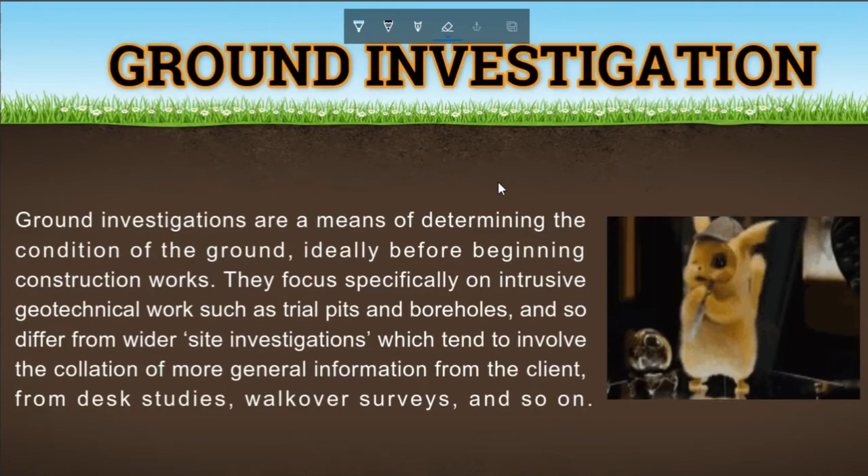So as the name implies, it is the method of investigating the ground, whether it is possible to build, for example, a two-story building, if it is compatible. Thus, the ground can bear the weight of the building. Next is borehole. So, since the topic is ground investigation borehole, what is a borehole?

It is a narrow hole drilled to establish the nature of, sample, test, or monitor soil, bedrock, or contained fluids and gases, or for abstraction of water or minerals. Boreholes are among the most frequently used methods of exploration in engineering geology and rock-related construction.

The greatest yield of geotechnical data is obtained from these boreholes when the borehole walls are investigated in addition to the core. So, what does borehole really mean? It is a hole in the ground. It is as big as 1 meter or more, and it is used to investigate the ground, whether it is solid ground, sand, or gravel, or whatever is underneath our feet.

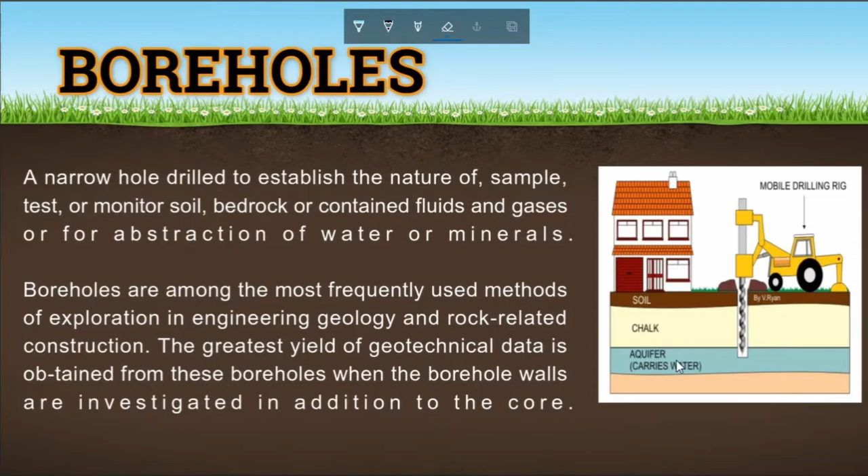Next is borehole drilling method, and there are 3 groups of methods. First is soil penetration, and we know that soil is smooth and sometimes it's sticky. Second is rock penetration. This one is the harder one. And lastly is the required sample or core recovery penetration. So later on, we will discuss and understand these 3 groups of methods.

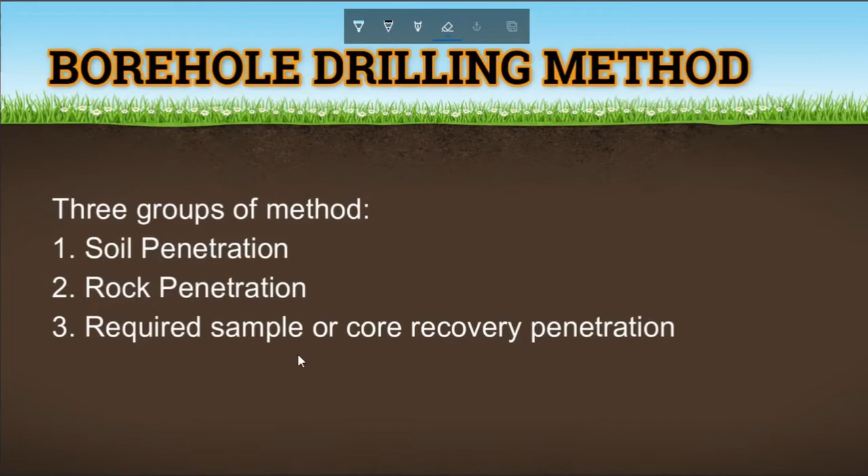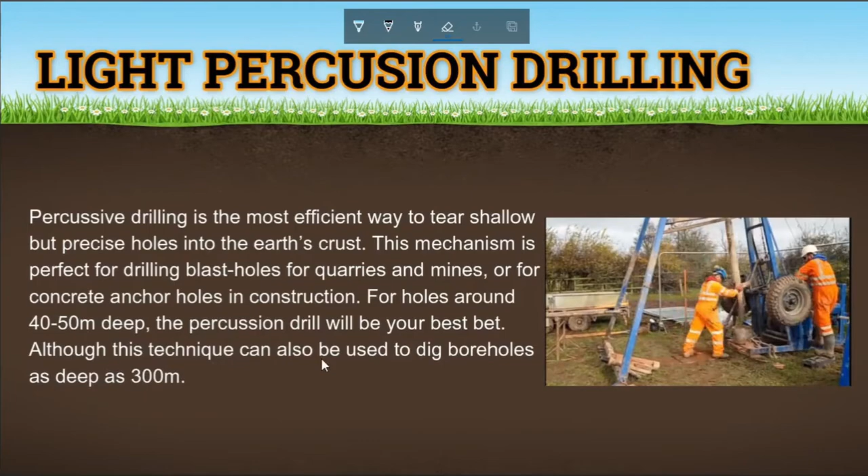Light percussion drilling. Percussive drilling is the most efficient way to tear shallow but precise holes into the earth's crust. This mechanism is perfect for drilling blast holes for quarries and mines, or for concrete anchor holes in construction. For holes around 40 to 50 meters deep, the percussion drill will be your best bet, although this technique can also be used to dig boreholes as deep as 300 meters.

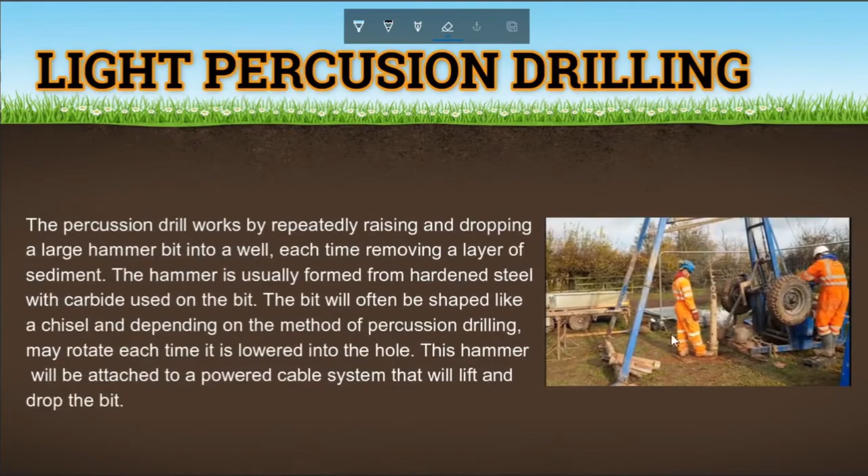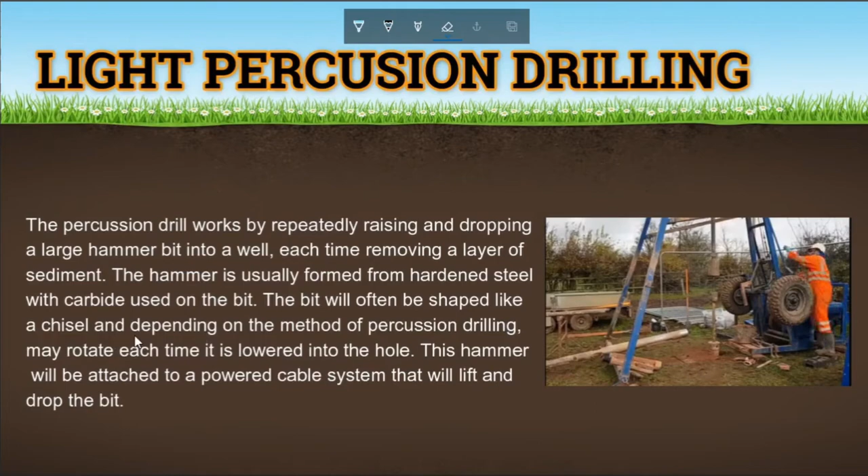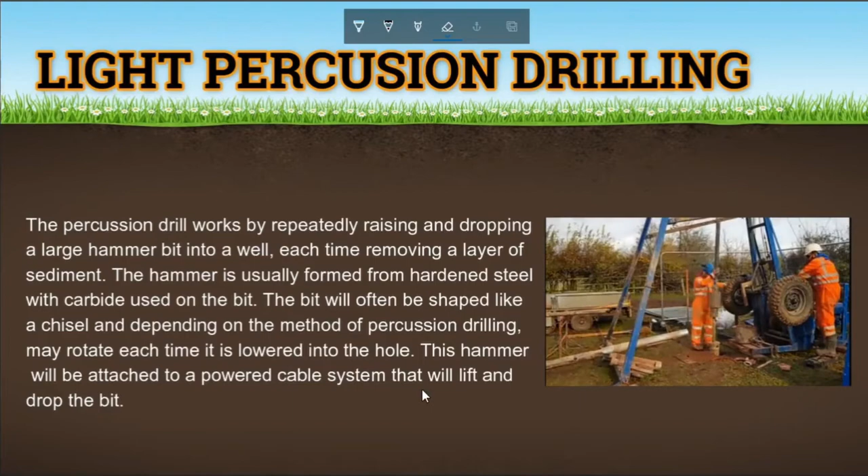The percussion drill works by repeatedly raising and dropping a large hammer bit into a well, each time removing a layer of sediment. The hammer is usually formed from hardened steel with carbide used on the bit. The bit will often be shaped like a chisel and, depending on the method of percussion drilling, may rotate each time it is lowered into the hole. This hammer will attach to a powered cable system that will lift and drop the bit.

This technique has existed through the ages. It used to require a hefty amount of manual labor, and yes, it still exists, for example, making a well. And in some third world countries, it still does. The manual predecessor to cable or rope percussion drilling works on the backs of the laborers.

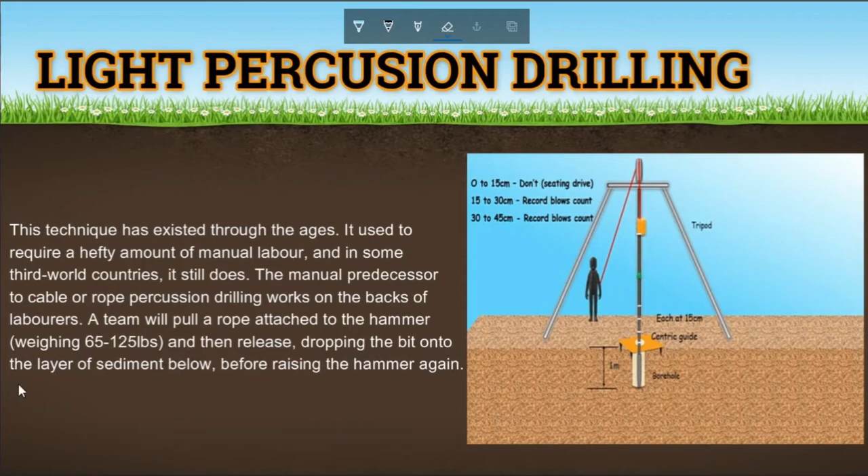A team will pull a rope attached to the hammer, weighing 65 to 125 pounds, and then release, dropping the bit onto the layer of sediment below, before raising the hammer again. This technique is still used to reach water in some African nations.

Manual percussion drilling uses water to create mud in the pit of the well. Next, a hollow tube that traps the mud is lowered into the well. This tube is then lifted to the surface and cleared. In air percussion drilling, the hammer will be driven by compressed air, with the rubble being cleared by the air returning to the surface.

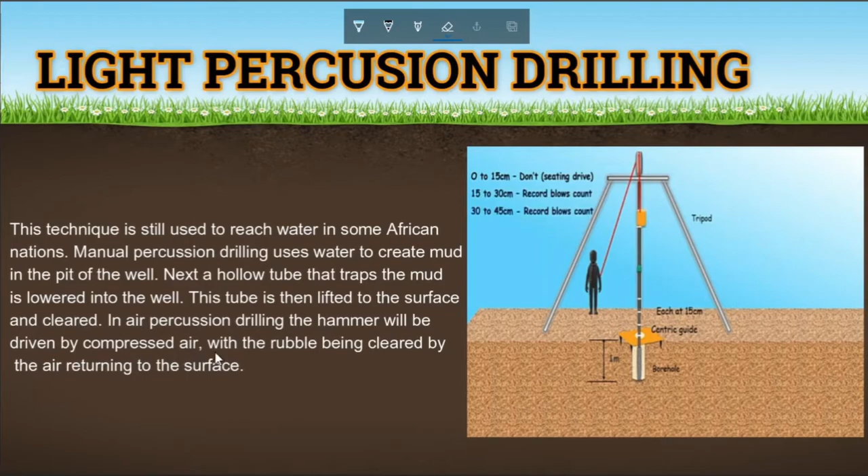And this is the illustration of the light percussion drilling, or the manual labor. As you can see in the picture, there are persons who are pulling the rope.

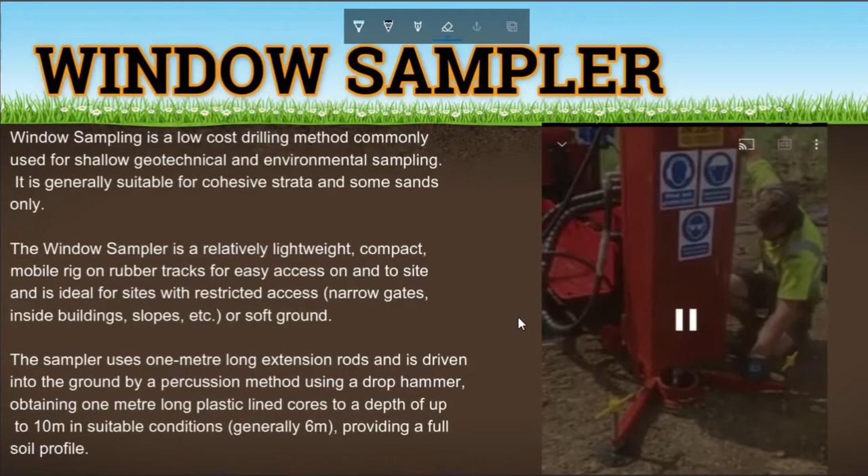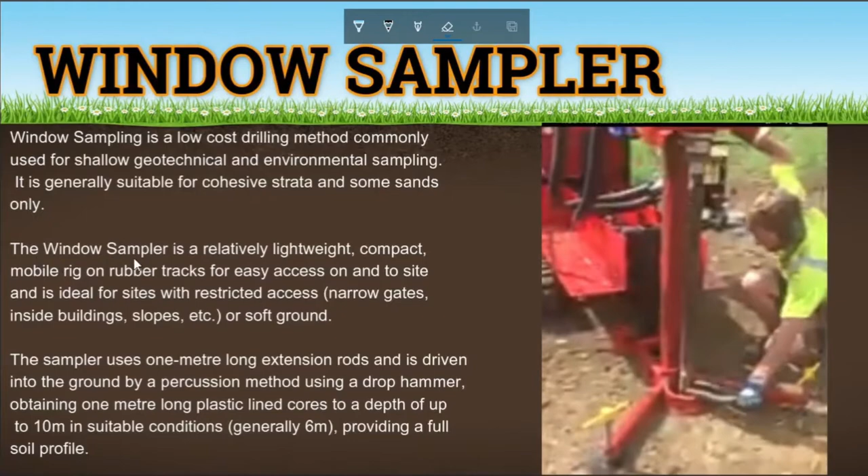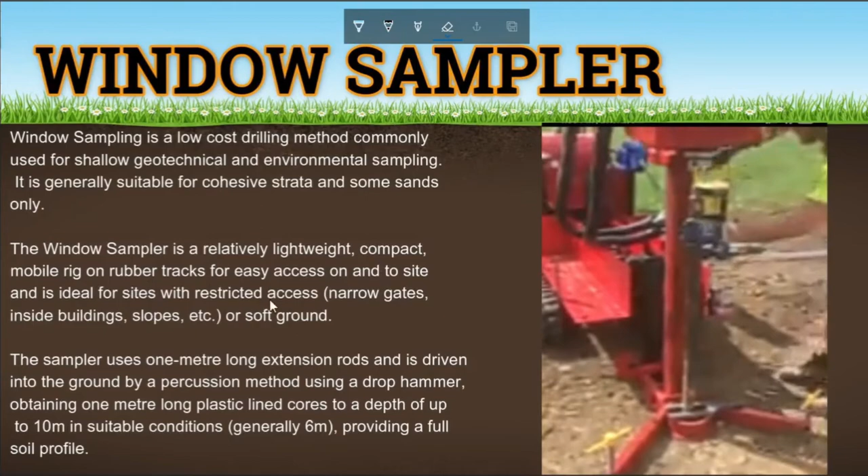Window sampler. Window sampling is a low-cost drilling method commonly used for shallow geotechnical and environmental sampling. It is generally suitable for cohesive strata and some sands only. The window sampler is a relatively lightweight, compact, mobile rig on rubber tracks for easy access on and to site, and is ideal for sites with restricted access or soft ground.

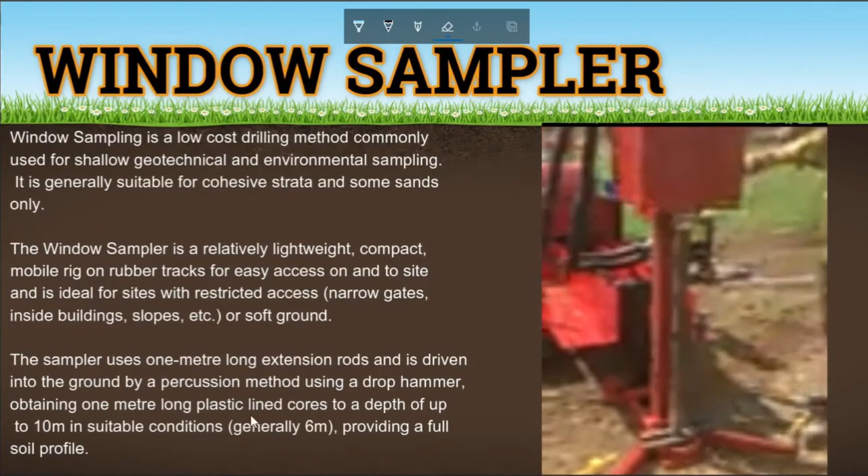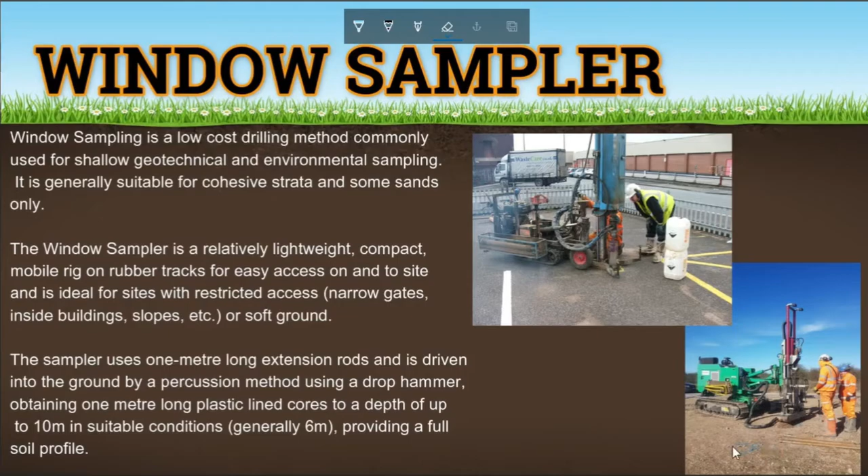The sampler uses 1 meter long extension rods and is driven into the ground by a percussion method using a drop hammer, obtaining 1 meter long plastic lined cores to a depth of up to 10 meters in suitable conditions, generally 6 meters, providing a full soil profile. And these are the examples of window sampler. As you can see, the ground is only a gravel or sand that is compacted.

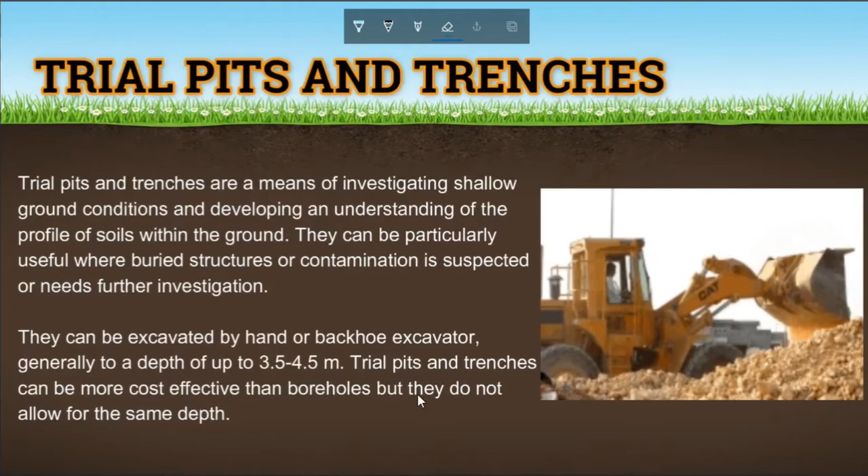They can be excavated by hand or backhoe excavator, generally to a depth of up to 3.5 to 4.5 meters. Trial pits and trenches can be more cost-effective than boreholes, but they do not allow for the same depth. These are the examples of trial pits.

Rotary coring. Coring is one method of collecting rock and sediment samples for geological research. A coring drill bit is designed with a central opening, around which the drill bit cuts the borehole. The core samples enter this hole into a special chamber, a coring barrel, as the coring bit advances, and then the sample is returned to the ship by wire.

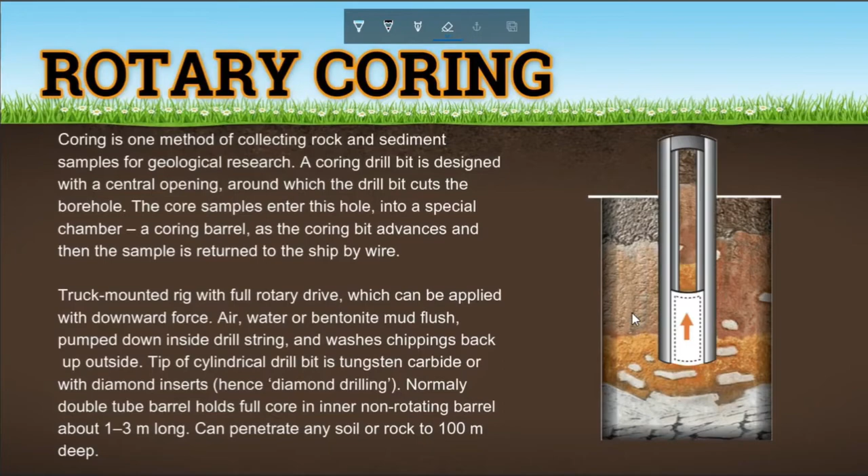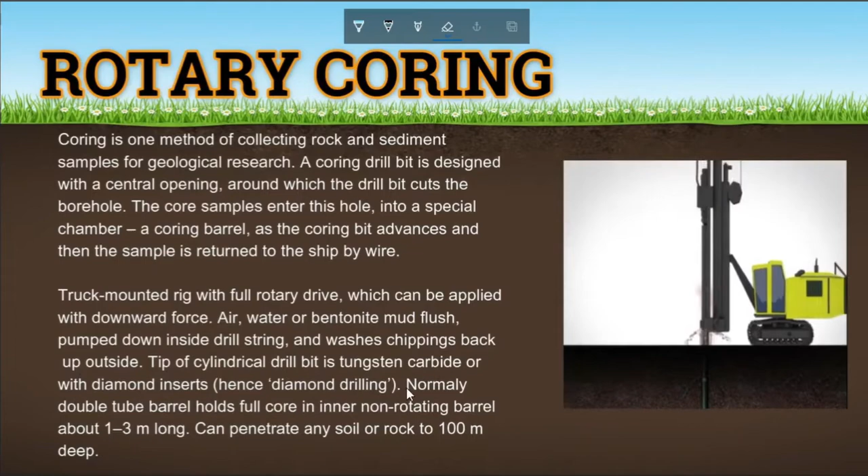Truck-mounted rig with full rotary drive which can be applied with downward force, air, water or bentonite mud flush, pumped down inside drill string, and washes chippings back up outside. Tip of cylindrical drill bit is tungsten carbide or with diamond inserts, hence diamond drilling. Normally, double tube barrel holds full core in inner non-rotating barrel about 1 to 3 meters long. Can penetrate any soil or rock to 100 meters deep.

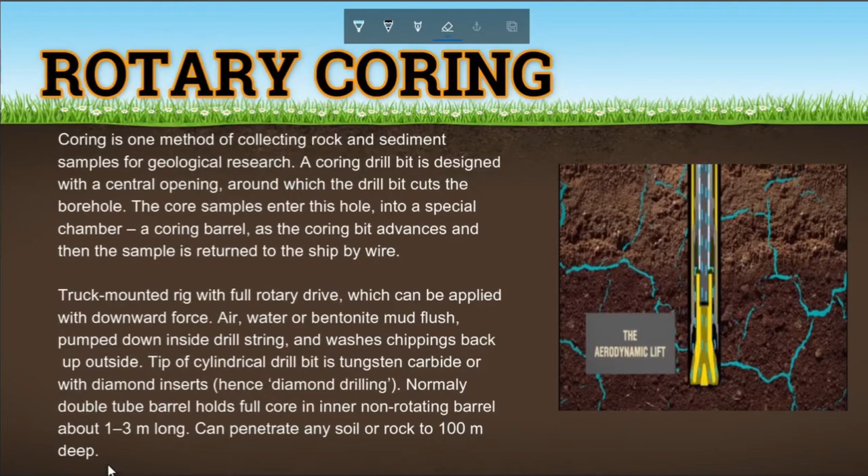Additionally, don't be confused about the meaning of rotary coring. By definition, coring involves drilling with a donut-shaped bit that allows a cylinder-shaped core of undrilled rock to rise up inside the pipe above it. Or coring is taking a cylindrical sample of a reservoir using a special drill bit and barrel.

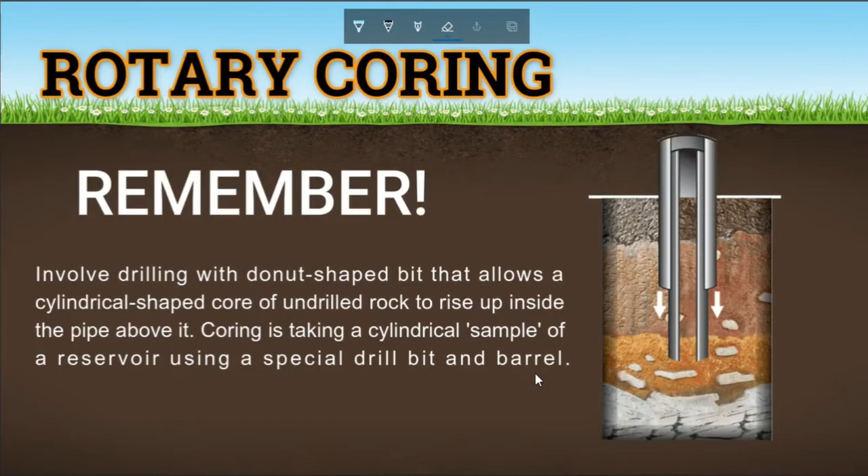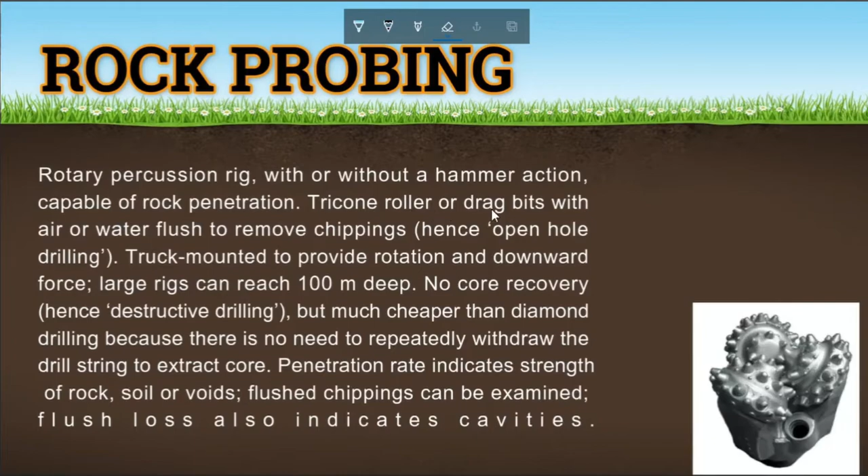Rock probing. Rotary percussion rig with or without a hammer action, capable of rock penetration. Tricone roller or drag bits with air or water flush to remove chippings, hence open hole drilling. Truck mounted to provide rotation and downward force. Large rigs can reach 100 meters deep. No core recovery, hence destructive drilling, but much cheaper than diamond drilling because there is no need to repeatedly withdraw the drill string to extract core.

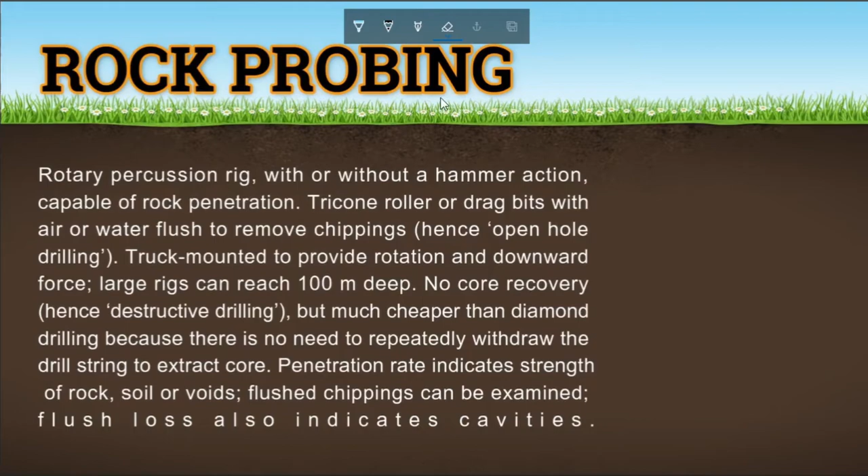Penetration rate indicates strength of rock, soil or voids. Flush chippings can be examined. Flush loss also indicates cavities. And also, about rock probing, don't be confused, because as defined, probing is for examining or observing a sample. And these are the alternatives among drilling equipment.

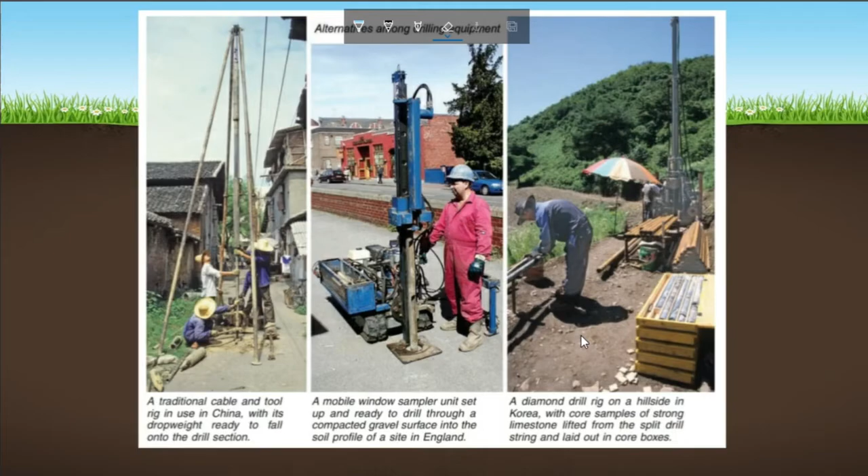The third one is an example of rotary coring, since as you can see the person is getting some samples, and of course it is under rock probing also, because after getting samples, the samples should be examined, and that is under rock penetration, and at the same time under core recovery penetration.

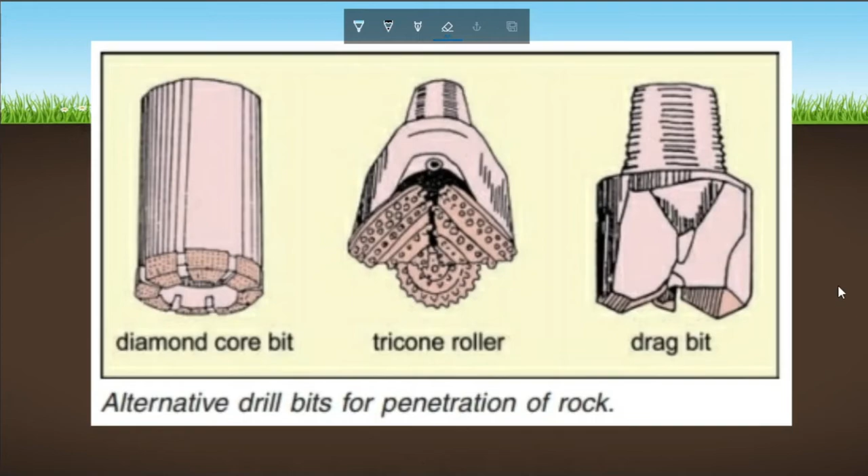And these are the alternative drill bits for penetration of rock. First is the diamond core bit, second the tricone roller, third the drag bit. Later on, I will be showing you a short video clip of how these alternative drill bits work.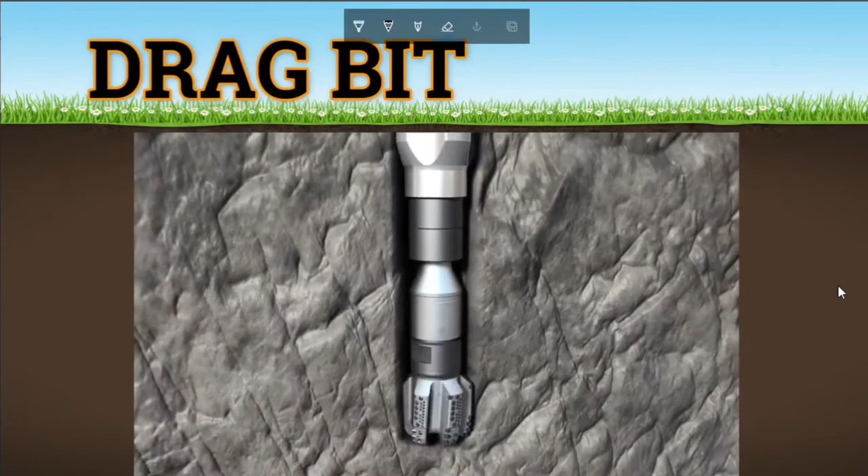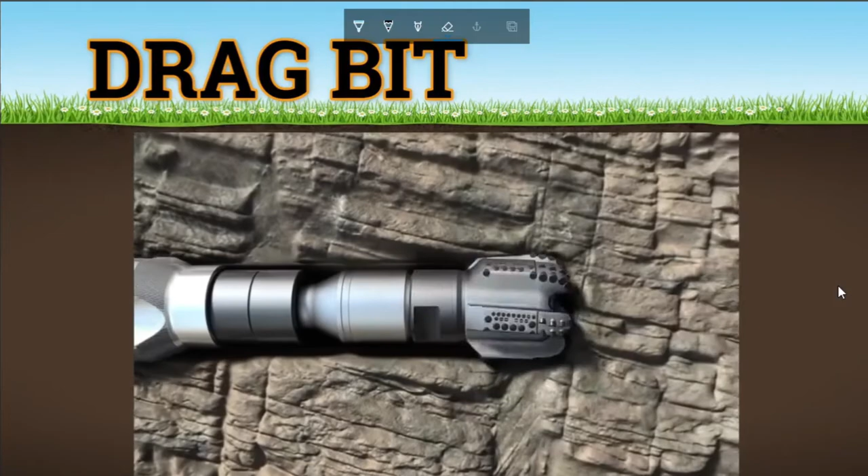Borehole records. All boreholes must be logged as fully and comprehensively as possible to be properly cost-effective. And as you can see in this picture, under the Nottingham Drilling, it has this client, the John Smith Construction. And they use two equipments. First is the cable percussion, which has a 6 meters depth, and the rotary coring, which has 24 meters depth. Summary log, and it happened in Derwent Road, Nottingham. Date is on 29th of February 2008.

Number, NGR, level, and the site coordinates. So, as you see here, it has these letters with its units. Under these columns, we can see the meaning of those letters above. D is for disturbed sample, U is for undisturbed sample, S sampling, K permeability, I point load strength, and standard penetration, R for rock quality designation, and C for core recovery.

The first equipment they use is cable percussion, and it only has 6 meters depth. So that is why there is this boundary or limitation line. In the first meter, it has disturbance, which is this symbol letter D. It has no K, I, R, and C, but has this, which means blows. And it has 6 counted blows. 1.4 meter depth, and this is the graphic log. For the thickness, it has 1.4 meters, and this is the description.

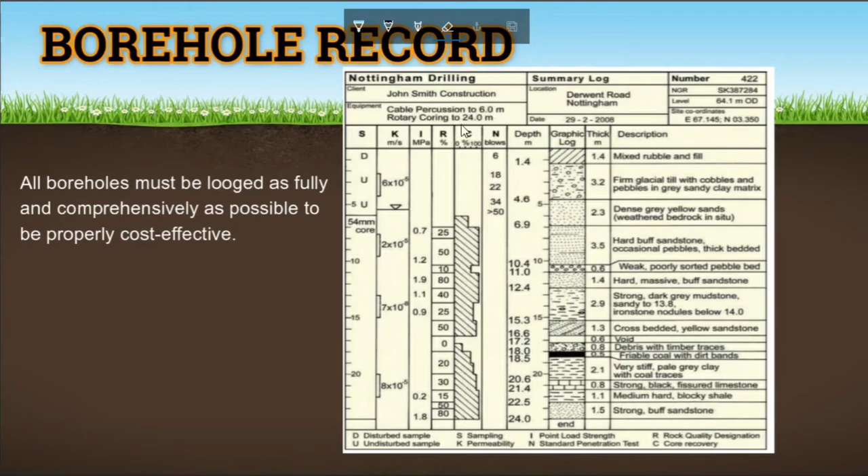How many boreholes and how deep? This can only be very rough guidelines. For spacing, buildings should be 10 to 30 meters apart. Road lines is 30 to 300 meters apart. And lastly is the landslides, at least 5 in line for profile. And for the depth, 1.5 times the foundation width below founding depth, plus at least one deeper control hole to 10 meters below foundation unless rockhead found.

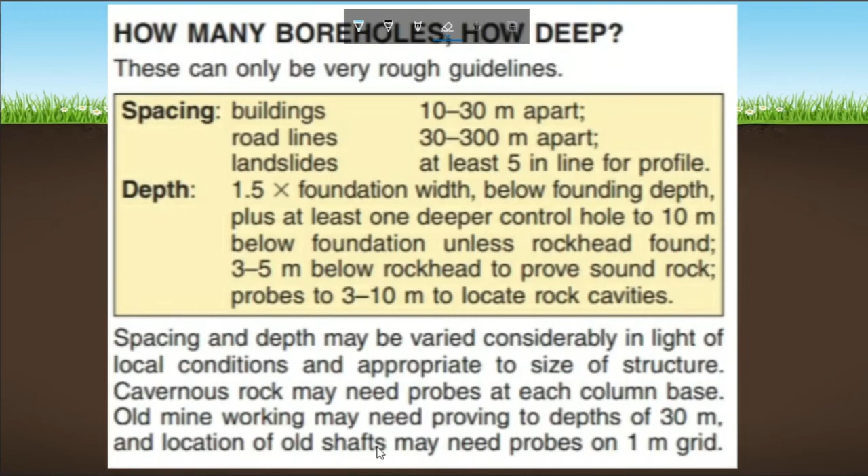3 to 5 meters below rockhead to prove sound rock. Probes to 3 to 10 meters to locate rock cavities. Spacing and depth may be varied considerably in light of local conditions and appropriate to the size of structure. Cavernous rock may need probes at each column base. Old mine workings may need probing to depths of 30 meters, and location of old shafts may need probes on 1 meter grid.

And this is for the borehole costs. Drilling costs may be estimated as accumulation of first, cost to supply rig onto site, second, cost of setup on each new hole, third, cost per meter of hole drilled. This table shows approximately relative costs: on-site plus per hole plus meter. First is window sampler, soil less than 8 meters deep, 400, 25, 7. Light percussion, soil greater than 8 meters deep,

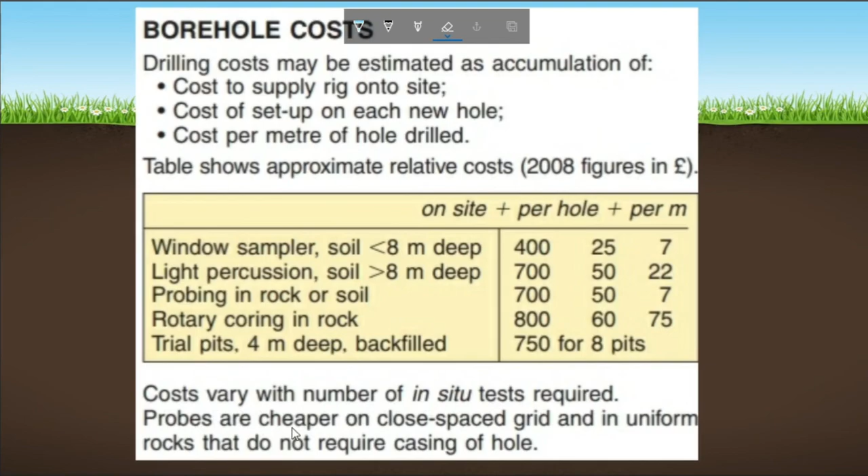700, 50, 22. Probing in rock or soil, 700, 50 and 7. Rotary coring in rock, 800, 60 and 75. Trial pits, 4 meters deep, backfilled, 750 for 8 pits. Costs vary with number of in situ tests required. Probes are cheaper in close-spaced grid and in uniform rocks that do not require casing of hole.